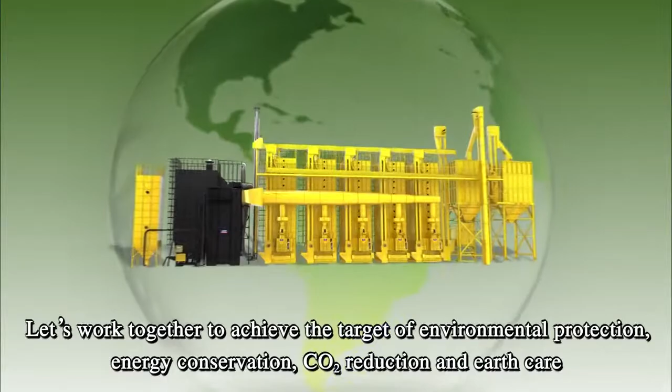Traditional farmers rely on the mercy of climate, but a farmer's hard work does not always bring in equal harvest. In the past, we harvested manually and dried using the sun. We were so worried that it would rain during harvest season, because if paddy was not dried immediately, it would sprout and become moldy, so we couldn't control the harvest in our hands.

The sprouted and moldy paddy can produce aflatoxin, one of the most toxic cancer-causing substances. Aflatoxin can even survive at 280 degrees Celsius. If our livestock are fed aflatoxin-contaminated grains, people will get poisoned after eating the meat, because aflatoxin frequently remains.

Only when grains are dried immediately while they are fresh can farmers produce high-quality rice that will yield a high price.

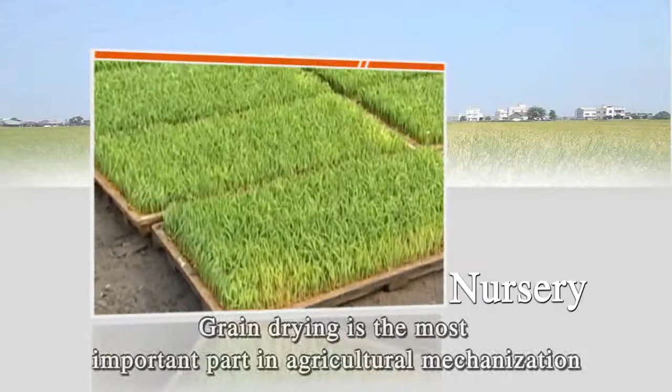Grain drying is the most important part in agricultural mechanization. It not only solves the grain mildew problem, but also enables people to eat fresh, clean, and healthy rice. Grain drying mechanization also ensures that farmers have complete control over the harvest.

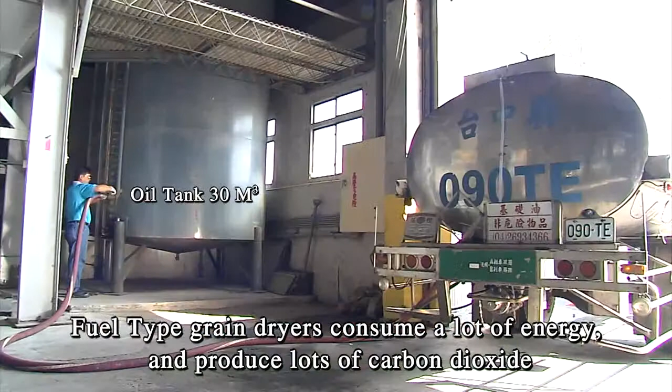Fuel-type grain dryers consume a lot of energy and produce lots of carbon dioxide. Also, oil prices are constantly increasing. Therefore, the increase of drying costs becomes farmers' biggest burden. For those countries with lower grain prices, farmers can afford to buy dryers, but cannot afford to buy diesel.

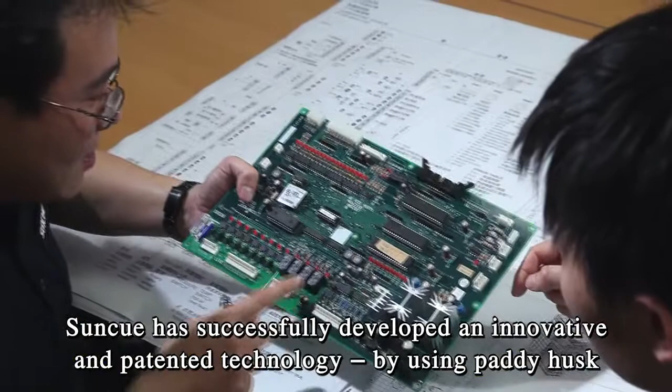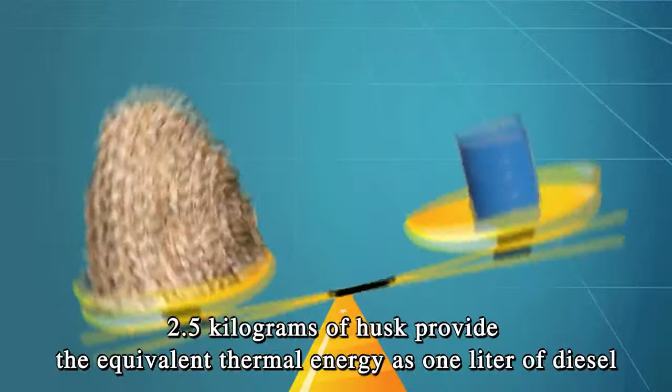In order to help farmers reduce high fuel costs when drying and decrease carbon emissions, SUNCUE has successfully developed an innovative and patented technology using paddy husk to completely replace diesel in the drying process. Husk is the hull of paddy, which is also rural waste, but it contains high thermal energy. The thermal energy generated by 1 kilogram of paddy husk is about 3,000 to 3,500 kilocalories. 2.5 kilograms of husk provide the equivalent thermal energy as 1 liter of diesel.

SUNCUE Husk Furnace has earned the patent on complete combustion technology. Husk milled from 1 hectare of paddy can dry 3 hectares of paddy, and husk from 1 ton of paddy can dry 3 tons of paddy. This triples the efficiency.

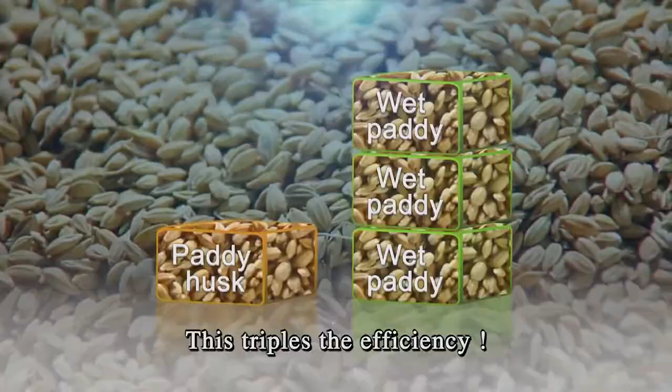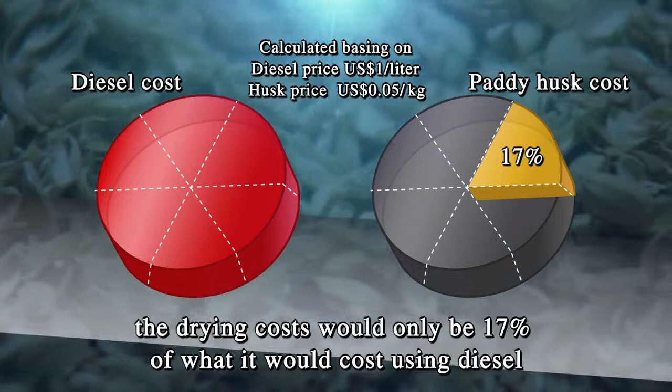The annual production of paddy, corn, and wheat in China is 474 million tons, which consumes fuel expense of about $69.5 billion US. If we use paddy husk to replace diesel in drying, the drying costs would only be 17% of what it would cost using diesel. Costs are also far lower than drying by sun, and the rice quality is much better. Paddy husk is biomass energy, and its net carbon emission is 0.

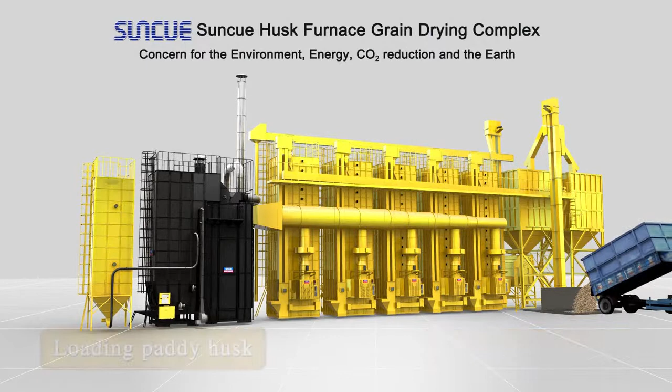After harvest, the farmers deliver wet grains to a SUNCUE Husk Furnace drying center. During the loading, the furnace's computer will auto-calculate the required husk feeding volume and blow it into the furnace. Then the hot air will pass through heat exchangers, and only clean air will be sent to the dryers.

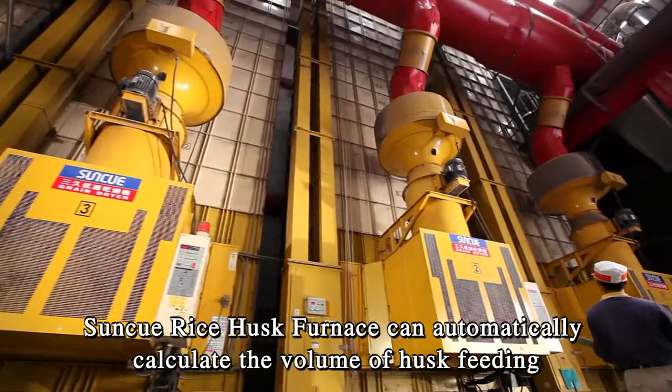SUNCUE Rice Husk Furnace can automatically calculate the volume of husk feeding, auxiliary air, hot air, and ash discharge based on the operating dryer units and the hot air temperature setting, so the husk is under perfect combustion. SUNCUE Rice Husk Furnace is the only furnace that can overcome the handling problems of black smoke and air pollution without using a smoke filtering system.

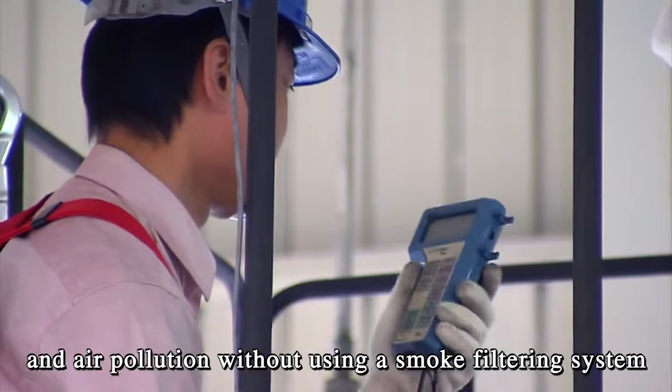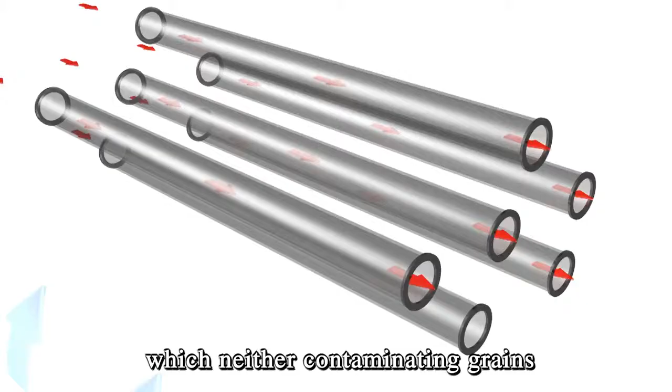In addition, SUNCUE Furnace is exclusively passing not only performance testing, but also air pollution testing in both Japan and Taiwan. SUNCUE Rice Husk Furnace uses a negative pressure and indirect heating system, which neither contaminates grains nor corrodes the dryers.

SUNCUE Furnace is also exclusively equipped with multiple safety devices and user-friendly design for simple and safe operation.

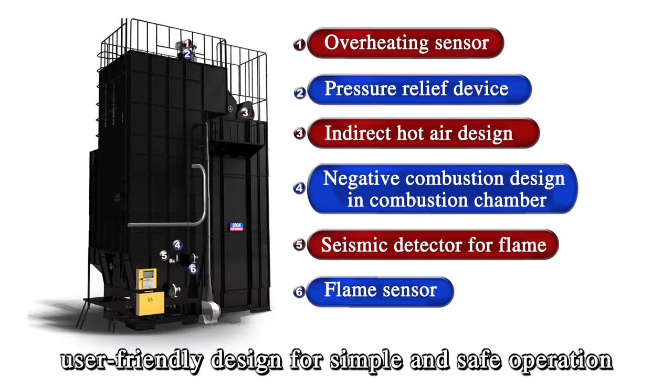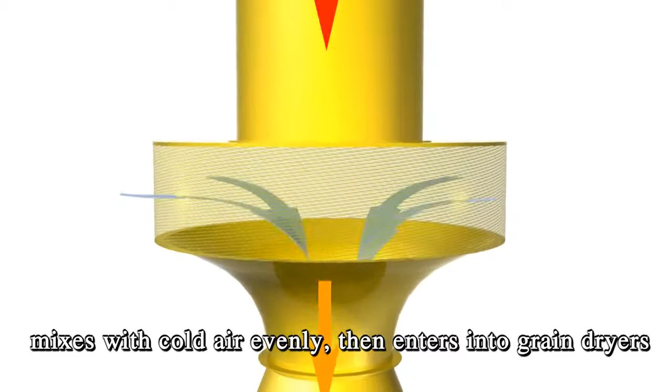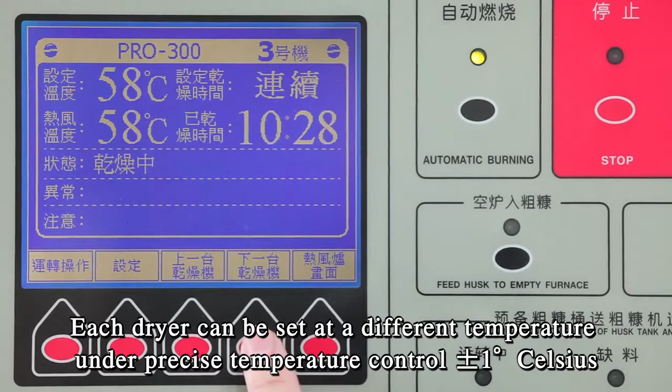The clean hot air produced by SUNCUE Husk Furnace passes through the micro-air adjuster, mixes with cold air evenly, then enters into grain dryers. The SUNCUE Husk Furnace is auto-control and can link 1 to 15 sets of grain dryers simultaneously. Each dryer can be set at a different temperature under precise temperature control, plus or minus 1 degree Celsius.

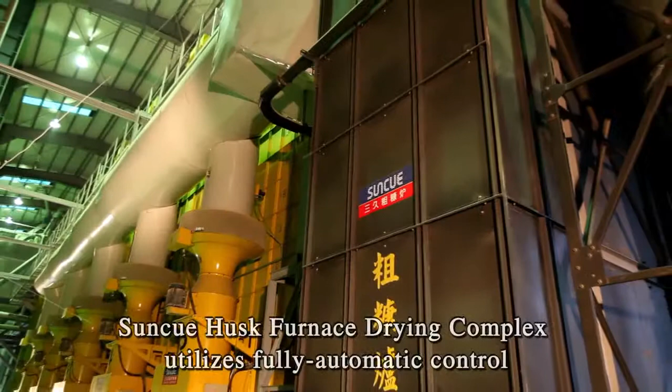SUNCUE Husk Furnace Drying Complex utilizes fully automatic control. Thousands of tons of grains can be managed by a single operator every day. By applying even, low temperature and speedy drying techniques, grains can benefit from high quality, high price, and high germination rates. Ash can also be used as organic fertilizer, soil improvement, or heat insulating material.

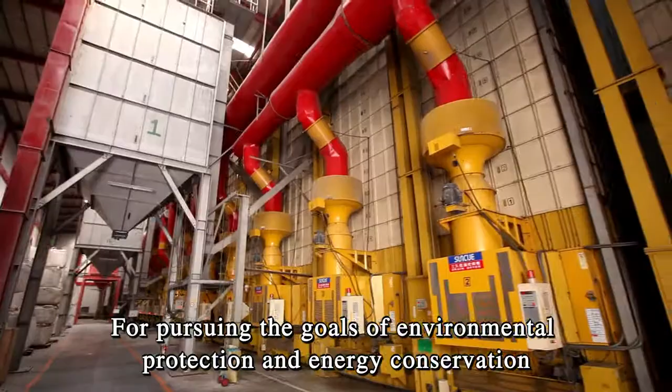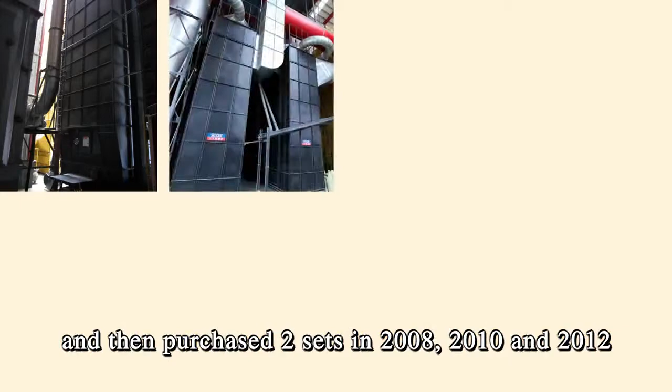Here is the leading small package rice in Taiwan, Union Rice. For pursuing the goals of environmental protection and energy conservation, Union Rice installed the first SUNCUE Husk Furnace in 2007, and then purchased 2 sets in 2008, 2010, and 2012 for a total of 8 sets.

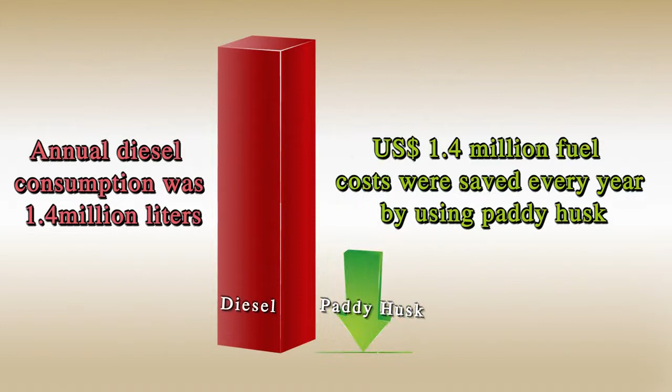Its annual paddy drying capacity is about 70,000 tons, which consumes around 1.4 million liters of diesel. $1.4 million of diesel expenses were saved after using self-milled free husk. 3,780 tons of CO2 emission was also reduced as a result. Union Rice is praised as an advanced green enterprise, and its high-quality rice has been successfully exported to Japan.

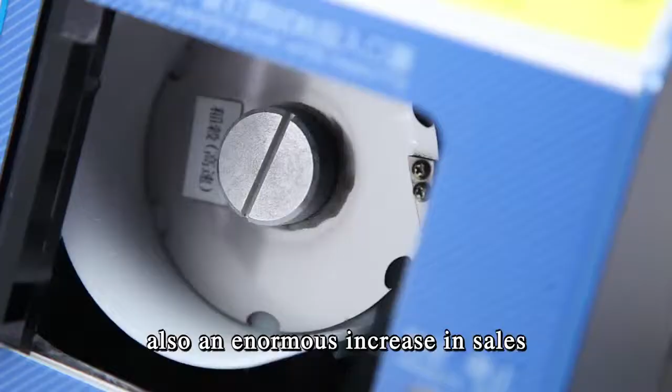We started using SUNCUE Husk Furnace in 2008. It helped us dry wet grains for all farmers in town, solve the drying problems, and also decrease the drying costs sharply. This Husk Furnace brings us high quality and higher price small package rice, and also an enormous increase in sales. We are all very satisfied.

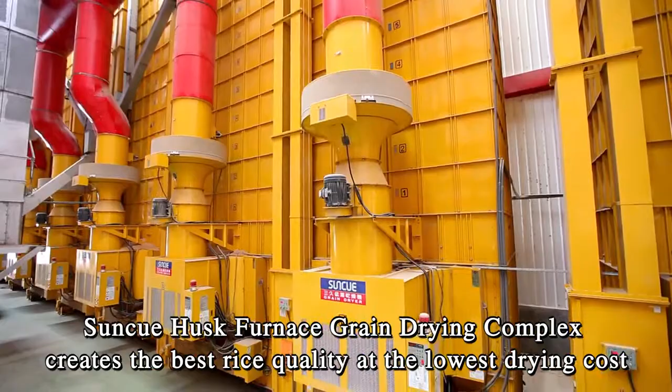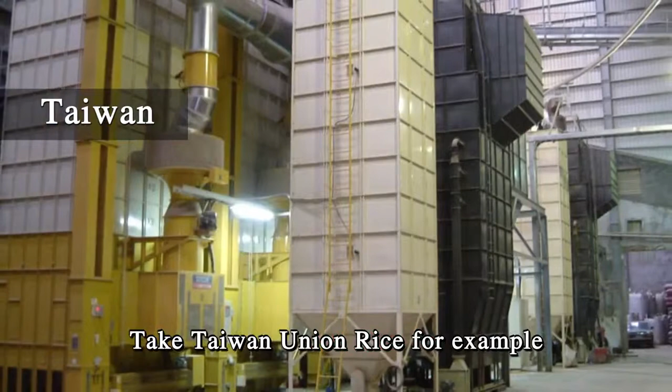SUNCUE Husk Furnace Grain Drying Complex creates the best rice quality at the lowest drying cost. In Taiwan, SUNCUE has many successful installations among all farmers' associations and rice mills. Take Taiwan Union Rice, for example. They use SUNCUE Husk Furnace 120 days per year, and each set can save fuel cost up to $175,000 each year.

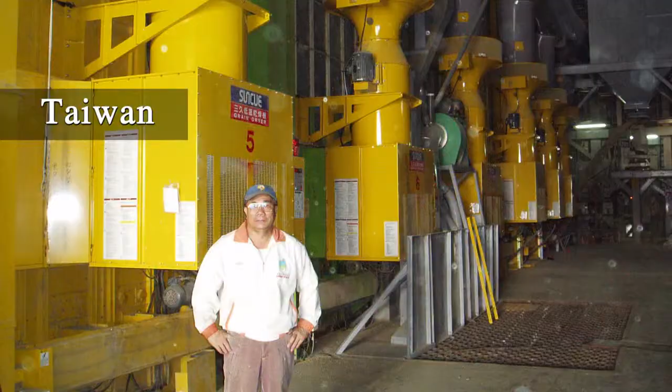The Liaoning Dingxiang rice mill in China uses SUNCUE Husk Furnace 270 days per year and saves $450,000 annually. Shanghai Farm and Chuadong Farm also installed 4 sets respectively already. SUNCUE Husk Furnace has successfully exported to Japan, Southeast Asia, Europe, Latin America, and other countries. Because of its high and fast return on investment, as well as its excellent performance in energy conservation and CO2 reduction, our customers consistently purchase and expand their business scale.

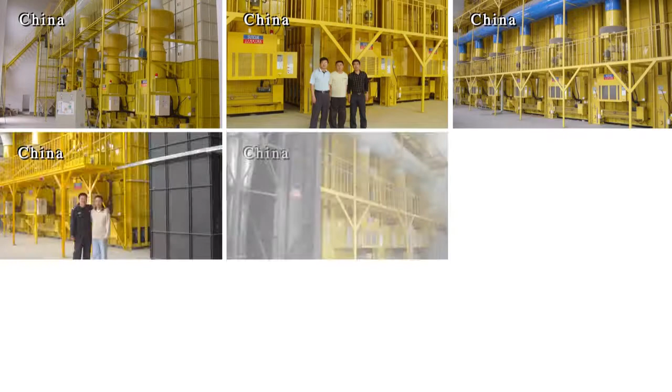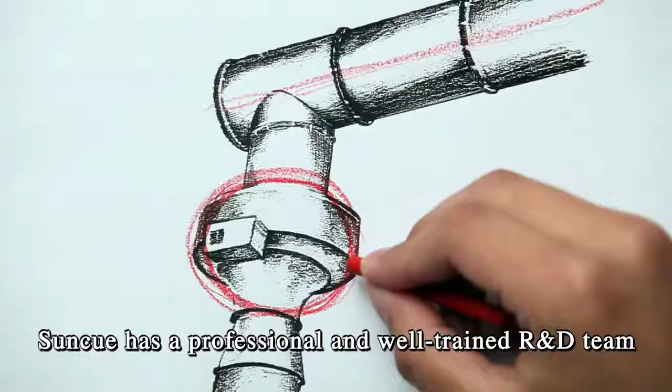SUNCUE, established in 1966, is the leading manufacturer of grain dryers with superior research and development capability. SUNCUE has a professional and well-trained R&D team who specialize in hydrodynamics, thermodynamics, combustion, and mechatronics. We also use 3D computerized design and drying technology.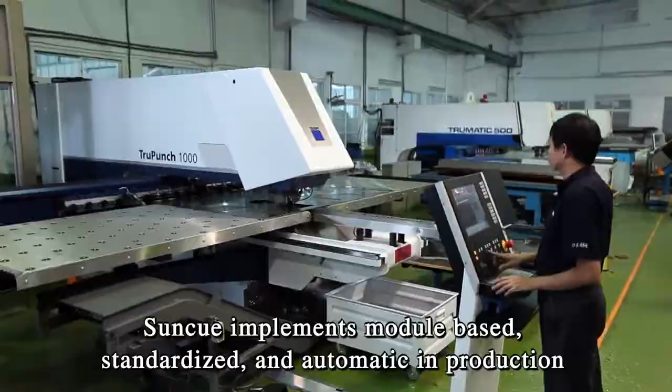SUNCUE implements module-based, standardized, and automatic production. We insist on high quality and steady performance of products. With advanced R&D competences, SUNCUE Husk Furnace was awarded the National Invention and Creation Awards Contribution Award, Taiwan Excellence, Small and Medium Enterprises Innovation Award, Scientific and Technological Agribusiness Excellent Innovation Award, and the Gold Medal at the iENA Nuremberg 2012 Germany.

Meanwhile, SUNCUE Shanghai has been awarded the following prizes and honors: High-Tech Enterprises in Shanghai, Contract Credit Rating AAA Enterprise, Shanghai Minhang District Model Unit, Foreign-Funded Enterprises with Advanced Technology, Harmonious Labor Relations Enterprise, Trustworthy Enterprise by Shanghai Customs. Only SUNCUE grain dryers are successfully exported to Japan, Korea, and more than 40 countries.

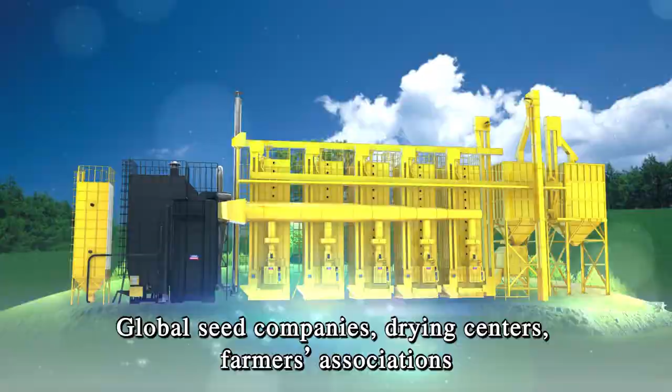Global seed companies, drying centers, farmers associations, rice mills, and farmers have been utilizing SUNCUE Husk Furnace Grain Drying Complex to reach the goal of environmental protection, energy conservation, CO2 reduction, and to bring a bright future to our planet.

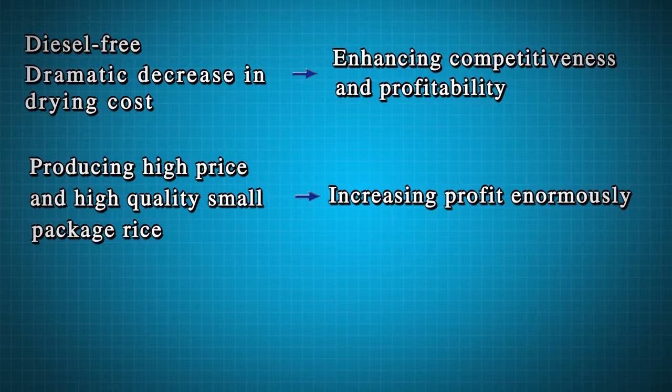According to the proof of SUNCUE's worldwide customers, SUNCUE Rice Husk Furnace is the only solution for diesel-free, dramatic decrease in drying cost, enhancing competitiveness and profitability, producing high-price and high-quality small package rice, increasing profit enormously, energy conservation, CO2 reduction, concern for the earth, and becoming the role model of green enterprise.